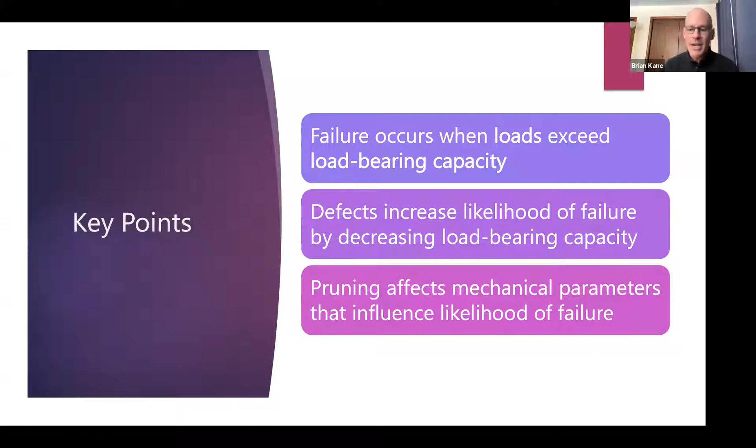One last introductory slide, which we call the fine print, and I don't want to shirk my responsibility for providing some hopefully helpful information, but there's a lot more than we can cover in an hour. In reality, this presentation includes 2 or 3 semesters of engineering and several research projects, a lot of background experience in pruning. We only have time to kind of scratch the surface of this. So it's important to just keep that in mind that there's a lot more to understand about this.

The other thing that's important to remember, certainly in terms of your personal experience as an arborist, is that for most of the topics that we cover in this presentation, there's not a huge amount of research. So it's not like we have thousands and thousands of trees that have been tested for many, many years that provide us a kind of academic or scientific consensus on what happens.

It's actually more important for you in terms of your personal practice to understand some of these basic physics concepts that we're going to cover, because that actually is going to help you apply your experience and this knowledge of some simple physics to all the possible situations that you're going to run into as a professional. So this is actually another really important thing to remember. Your experience is going to be very valuable because we don't have a huge amount of research on many of these topics.

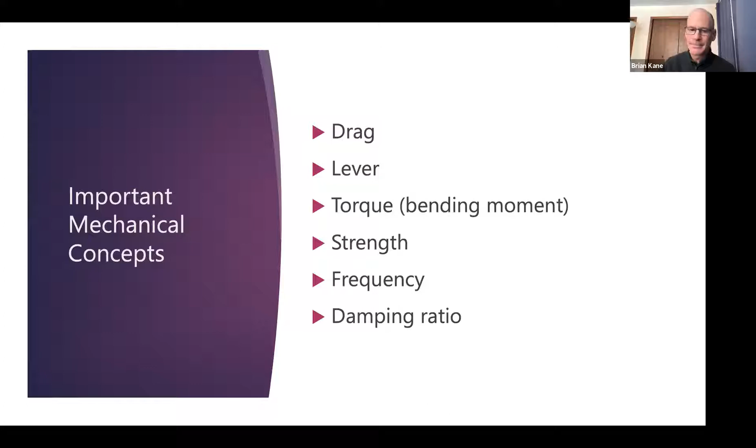So here's just a quick reiteration of this key concept. Failure occurs when the applied load exceeds load-bearing capacity. And so some of the research we've done actually looks at exactly this sort of thing. How much force, how much load can a tree bear when you apply it? So here's just a quick video to illustrate this.

You can see there's a cable up in the top of this tree over here. We're just pulling on this nice large red maple with a winch, with a forestry skidder. We measure the amount of force it takes to break it apart. And then we do tests on trees that don't have decay. We do tests on trees that have weak unions. We also do tests on trees that have decay.

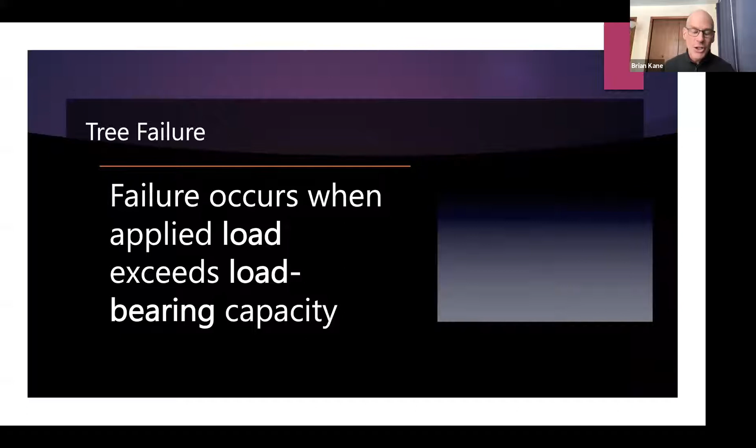Here's a classic example of failure. You can actually see some callus wood right down at the base of this tree. This tree is almost completely hollow, and you see the way it fails. So you actually get a lot of insights into how trees behave as structures when you tear them apart like that.

The load that we are going to focus on today: trees experience lots of different loads. So there are the loads of gravity, the tree's own weight, the loads of gravity affecting snow or ice on a tree; climbing into a tree imparts a load, rigging trees, all of those are loads that trees have to bear. The one that's most relevant for today's topic, in terms of pruning, is the load that is caused by the wind.

And so the wind load, or the force of the wind, has a specific name, and it's called drag. And the equation you see on the screen here is drag is equal to 1/2 times this little P-like letter, and then A, C_D, and V squared. This is a list below of the different variables that are in that equation. So that little P-looking thing is actually the Greek letter rho, and it just signifies air density. A is for frontal area. Imagine taking a picture of a tree and then measuring how much leaf area was presenting itself from the front.

C_D is something called drag coefficient, and I have a slide next to illustrate this and distinguish it from the frontal area. But basically, drag coefficient is a measurement of how streamlined a structure is, so how easy it is for air to pass around a solid object. And the last variable that affects drag is the velocity, symbolized by the letter V.

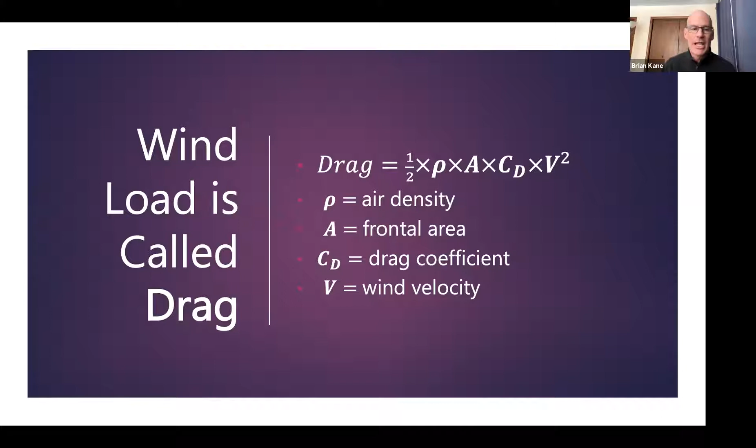So this slide here, I got from the NASA website, the website down at the bottom here. There's actually a lot of really nice illustrations on that NASA website. The drag coefficient is this measurement of how streamlined an object is. And so what you see here is all these black shapes. There's a flat plate, a sphere, a prism, a bullet, and an airfoil. That's just the wing of an airplane.

So all of those objects have the same frontal area. When we're calculating drag, that's what the frontal area is, what you'd measure. And you can put a tree up here and it has a certain frontal area. The drag coefficient, which is typed in red font next to each one of these shapes, is very, very different. Depending on how easy it is for air to pass around that object, that's what the drag coefficient is reflecting. So if you just have a flat plate of steel, the drag coefficient is 1.28.

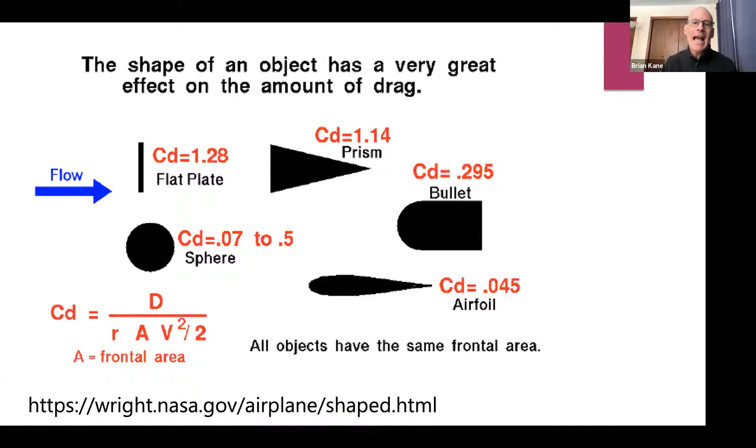Whereas if you have an airplane wing, the drag coefficient is 0.045. So it's much easier for the wind to pass around that airfoil, even though it has the exact same frontal area as this flat plate. So not going to belabor this point, but it is important to recognize that the shape of an object, so the shape of a tree, not just its frontal area, can have an influence on how much drag the tree experiences when the wind is blowing on it.

Okay, so back to this equation for drag. There's all these factors here: air density, frontal area, drag coefficient, and velocity squared. So of these, which is the most important? Hopefully, if you look at the equation, you recognize that velocity is the most important because drag is a function of the velocity squared. So for any of the other factors, like the air density, realistically that's not going to change very much if you're in the same place. It only changes if you go to really high elevation or really low elevation.

So the air density, if you double it, then you'll double the drag. If you double the area, you'll double the drag. If you double the drag coefficient, you'll double the drag. All of those factors have a one-to-one relationship. If you increase them or decrease them, the drag will increase or decrease as a factor of 1.

With velocity, the fact that it is squared means that any multiplier, so if we double the velocity, multiply it by 2, you have to square that, which means the drag is going to be 4 times greater if you double the velocity. And if you triple the velocity, the drag is going to be 3 times 3, 9 times greater. And if you multiply the velocity by a factor of 4, 10 miles an hour to 40 miles per hour, the drag is going to be 16 times greater. 4 squared is 16.

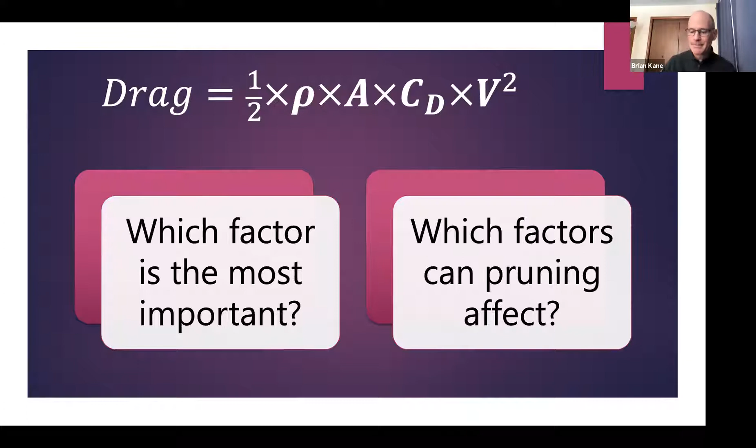When the wind is blowing on a tree, there's a lever that's involved. And I'll show you a diagram of that in the next slide. The lever is basically a distance between where the wind is pushing on the tree, so up in the crown of the tree, and where the tree is being held in the ground. So that distance, we call that a lever. And whenever you have a force that acts over a lever, it's going to create something called a torque.

So anyone who's used a wrench before, the probably common scenario is if you get a flat tire and you've got to loosen the lug nuts on your car tire. You have a wrench, you exert a certain amount of force on that wrench. The torque that you generate is the amount of force times the length of the wrench. That's the lever that you're applying that force over.

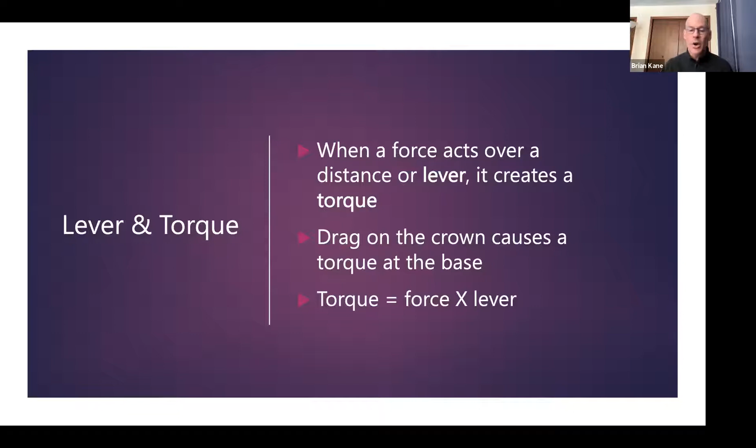So wind does the exact same thing, either to an individual branch, because the branch is basically held at the base where the attachment is, or to the whole tree, because the ground is holding the whole tree in place. So when you have forces acting over a lever or a distance, you get this torque. And the torque is force multiplied by the lever.

Lever is another one of these really important physical concepts because when forces act over levers or over a distance, they get multiplied by that lever and it causes this torque. If you try to loosen the lug nuts on a tire just by holding the lug nut with your hand, good luck. Even if you had a socket wrench and you just tried to hold the socket in your hand and turn it, good luck. You absolutely need a lever. You need to generate a torque to loosen up that nut. The same magnification effect happens when drag is acting on the crown of the tree.

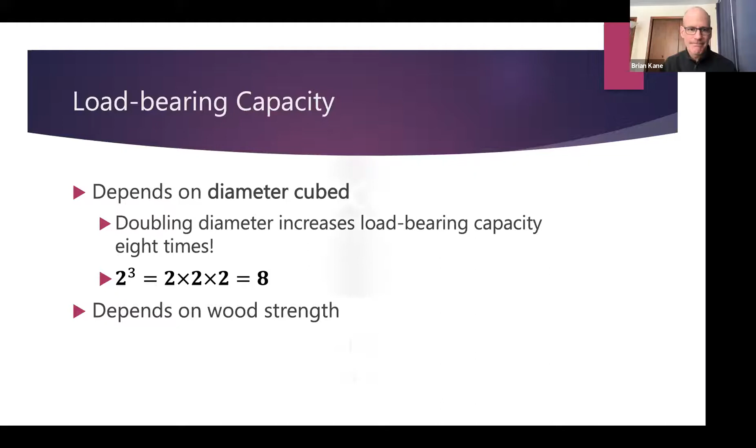Decay is the best example of a defect to illustrate how structural defects like decay or weak branches or cracks and those sorts of things increase the likelihood of failure, because it reduces the load-bearing capacity.

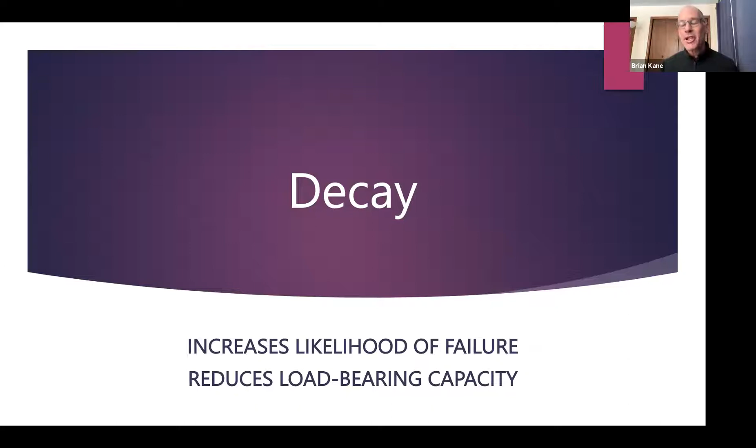Even if this cross section were solid, decayed wood has much lower strength in it. And so even though it's a 20-inch diameter tree, if it were mostly decayed wood, that is not going to provide nearly the same amount of load-bearing capacity. So this becomes important, and I use decay as an example of defects because it's easy to see how it reduces the load-bearing capacity.

But decay is also something that can happen in the long term when we prune trees. So there is a potential impact of pruning, not just in how it changes the drag or the torque on a tree, but also how it potentially decreases the load-bearing capacity because of decay associated with pruning wounds. And so we'll talk about that once again at the end very quickly when we look at pruning.

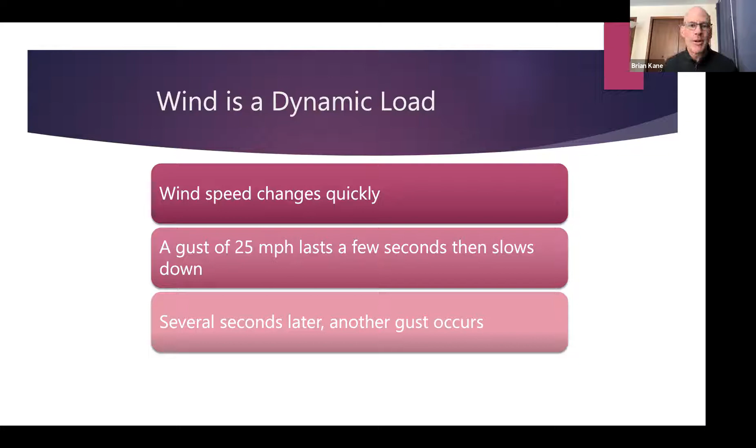Because wind is a dynamic load, we have to understand not just its speed, not just the velocity of the wind, but we also have to know about how the gusts occur with respect to time. And this is called the gust frequency. So it's basically how many seconds elapse between each gust of wind. And it usually is going to be relatively low. So that means it's usually going to be several seconds, 10, 15, 20 seconds between gusts of wind.

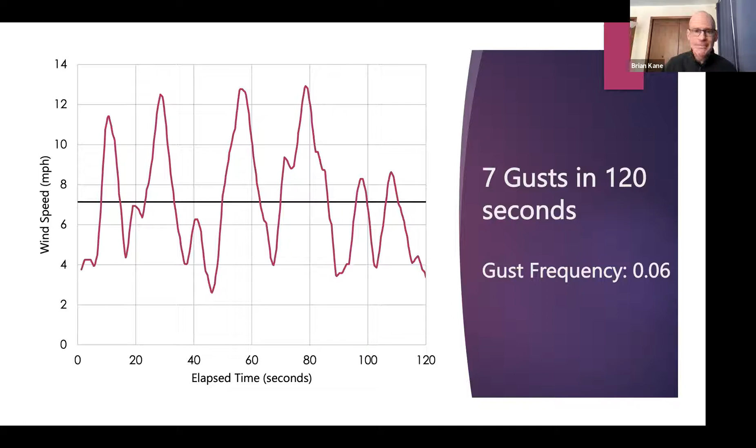The reason this is so important to understand the gust frequencies is because, again, anybody who's watched trees moving around on a windy day knows that the tree responds by swaying. So when the tree is exposed to that force of the wind, when the drag is pushing on that tree, it responds by swaying back and forth. That could be individual branches swaying, or if the wind is strong enough, it could be the whole trunk swaying back and forth.

When we think about the tree responding to these wind gusts by swaying back and forth, we need to understand two important factors that are directly related to the tree itself. And so the first one is called the sway frequency. Just like the gust frequency is how many gusts of wind in a certain amount of time, the sway frequency is just how many tree sways there are in a certain amount of time.

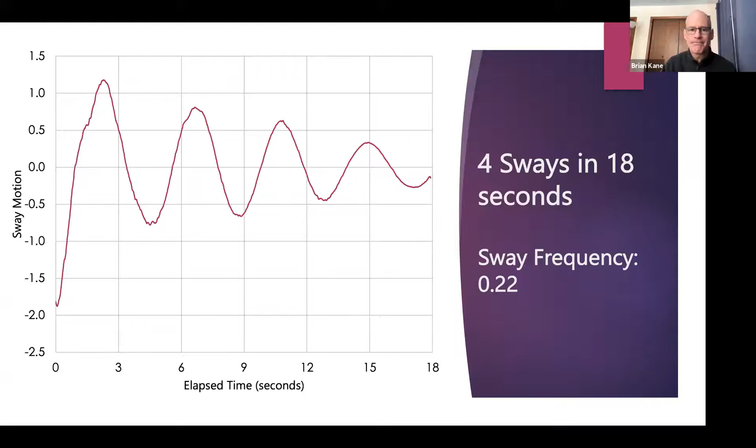0.22 sways every second. And remember, the gust frequency was 0.06, so they're not really close, and that also has implications for tree failure. When the gust frequency is similar to the sway frequency, you have a much greater likelihood of failure. Most wind gusts, again, occur at a lower frequency. So 0.06 is a pretty low frequency.

If the tree sway were closer to that value of 0.06, even if the velocity never changed, even if the wind didn't speed up, you would increase the likelihood of failure because the sway frequency and the gust frequency are similar. So I don't have time to go into the physics that's behind this, but imagine pushing somebody in a swing. When do you push that person to get them to swing more? You push them when they have reached their maximum backwards swing.

You don't push them when they're not right there, because you're going to be pushing air. And you certainly don't push them when they are still moving back towards you, because you're going to either push them off the swing or you're going to break your wrists. So you push them when they are at their maximum backward motion, just before they start going forward again. You can get them to swing higher and higher, more and more, even if you don't exert any more force.

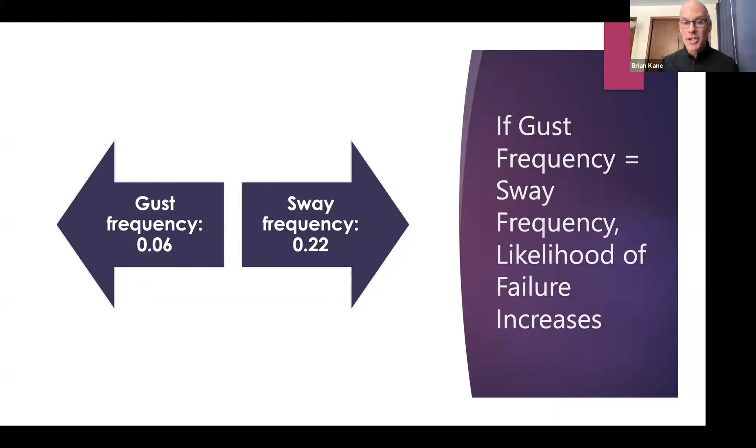So even if the velocity of the wind never increases, if the sway frequency is close to the gust frequency, likelihood of failure increases. So if pruning can change anything, we want sway frequency to be different than the gust frequency.

So one last concept here on this idea of dynamic loads and the dynamic response of the tree, and that's this idea of damping ratio. So you could see wind pushes on the tree, drag pushes on the tree, and if nothing else acts on that tree, no other gust of wind comes by, the tree's going to sway back and forth. Eventually, it's going to stop swaying. That's what damping is. It's basically the dissipation of energy by the tree moving back and forth.

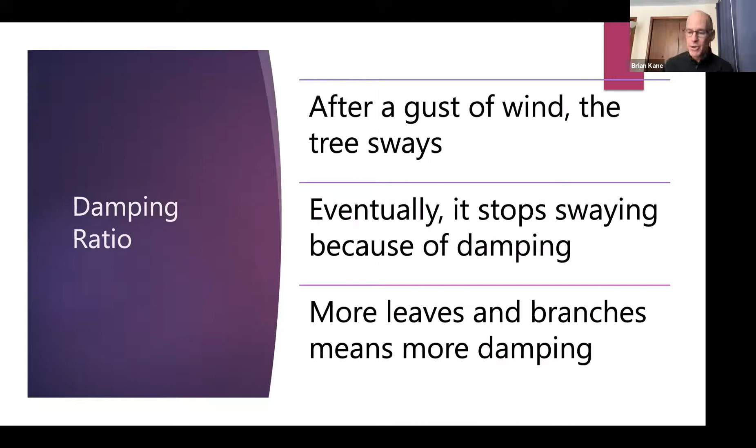And so when you have, for example, lots of leaves on the tree, when you have lots of branches on the tree, all of those factors increase the damping ratio, which means the tree is not going to sway very much after a gust of wind pushes on it. And more damping means lower likelihood of failure. And this video will illustrate that.

If you look closely at the video, you'll watch the trunk only moves a very little bit as we winch it and then let it go. The branches continue to sway for quite some time, but the trunk really only sways back and forth a handful of times. And the reason for that is because those branches are doing a really good job of dissipating the energy. They're moving so that the trunk doesn't move.

You also notice that the branches aren't moving exactly the same. Some of them are going forward and back. Some of them are going backward and forward. Some of them are going up and down. Some of them are going down and up. So when branches move differently like that, that also increases the amount of damping on the tree. And more damping is good. More damping means lower likelihood of failure.

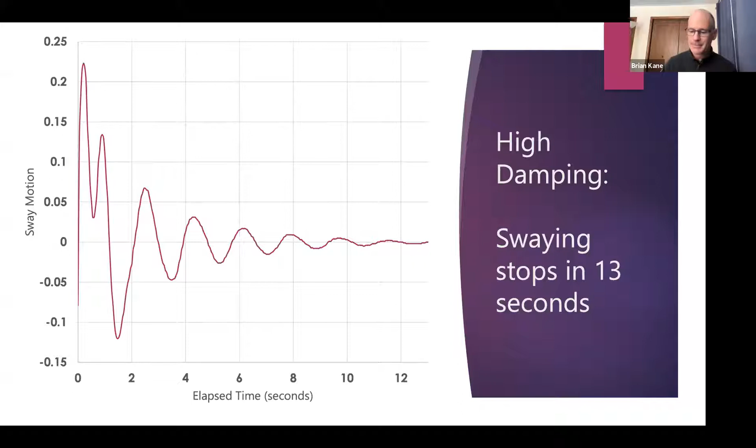So now, again, I apologize for going rather quickly, but that's basically several semesters of engineering pushed into a really short time frame. If you understand those physics concepts, that will give you a really good handle on how pruning can potentially affect likelihood of failure, because pruning potentially can affect the drag, the torque, the lever, the frequency, and the damping ratio. We've done a fair amount of work on this to give us some idea of what's going to happen when you prune a tree in a certain way and if you prune a certain amount.

What hasn't really been done, and I'll reiterate this again at the end, is looking at both short-term and long-term consequences of pruning. Most of the research that has been done by me and by lots of other people has only been short-term consequences of pruning, like driving that tree in the pickup truck, prune it, drive it again, and like 5 minutes later, you're measuring the force on it again. Longer-term consequences are potentially just as important in terms of likelihood of failure, but there haven't been nearly enough long-term studies of how trees respond to pruning.

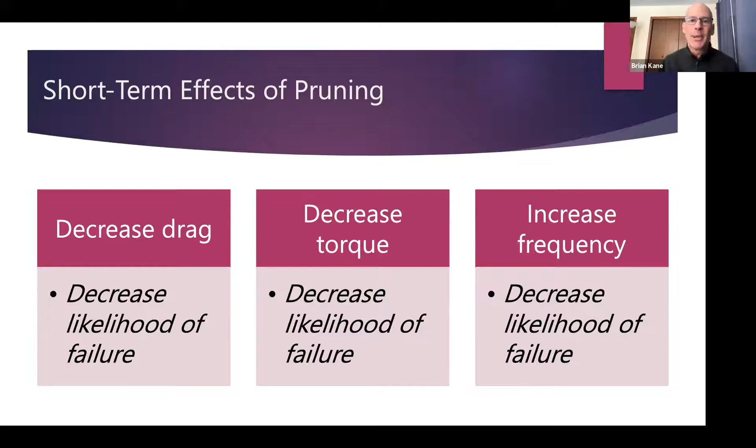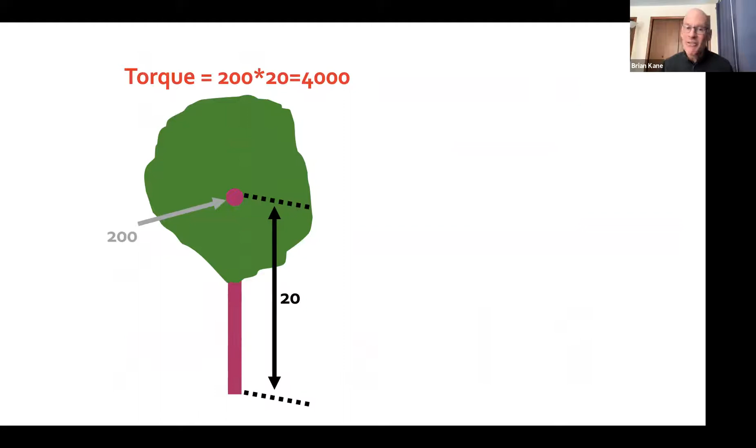So just to put some numbers, here's a tree that experiences 200 pounds of drag. That's the grayish arrow on the left-hand side. And let's just pretend it's got 20 feet of lever. So the torque on this tree is 200 pounds times 20 feet, 4,000 foot-pounds of torque. So we're going to prune this tree.

The first type of pruning is to reduce it. When we reduce it, we're pruning foliage out, so we're reducing the crown area. That means, again, making up these numbers, now there's only 100 pounds of drag. So we've cut the amount of drag in half. Because we shortened the branches by reduction pruning, we also lowered that lever. We brought the crown center down a little bit lower. So now the leverage is only 15 feet.

And of course, now you multiply 100 times 15, and we've got 1,500 foot-pounds of torque. So we reduced both the drag, 200 pounds to 100 pounds, and we reduced the lever, 20 feet to 15 feet. Let's look at a different type of pruning.

If we raise the crown of the tree, we can still reduce the drag. So we still changed the drag from 200 pounds down to 100 pounds of drag. We still cut the drag in half. But because of removal of the lower branches in the crown of the tree, the center of that crown actually got raised up. So it's now 25 feet from the ground.

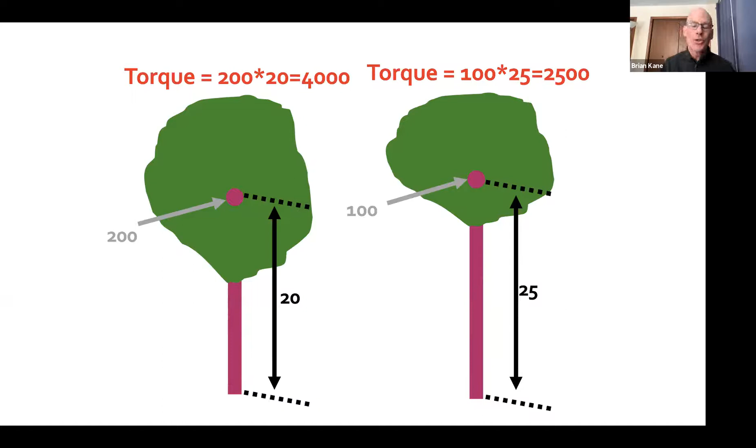So the shorter the branches, the higher the sway frequency. The longer the lever, the lower the sway frequency. Lower frequency is not good. It brings the tree closer to the gust frequency, which is usually going to be low. Faster sway frequency, lower likelihood of failure, because the wind gusts are usually going to be low frequency. So you want a tree that's going to sway back and forth faster, and it's not going to be affected by that swinging effect that we described.

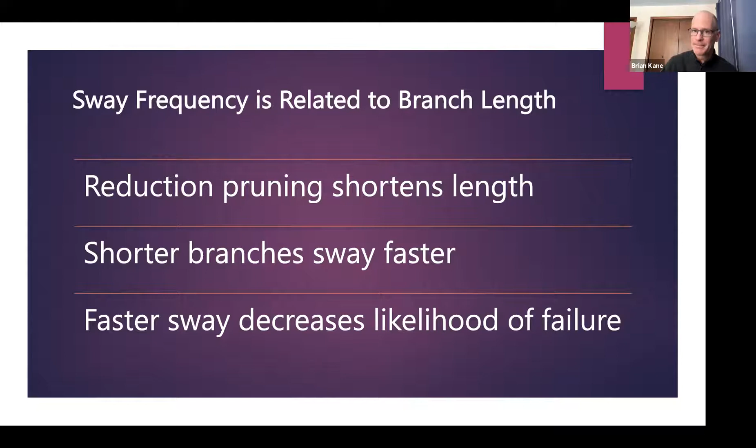All of those effects on drag, on torque, and on sway frequency, all of those have been studied, and we've done some of that work. Others, you listened to Dr. Gilman this morning. He's done some of this work. All of those studies are short-term studies. They basically look at the tree before it's pruned, then prune it, and then test it again, usually within probably an hour or so, maybe even less than that. The long-term effects haven't really been studied nearly as carefully, and as a result, it's hard to know exactly how pruning is going to affect the tree in the long term.

So, for example, depending on the species, depending on the growing conditions, depending on the type of pruning and how severely you prune a tree, the tree is going to regrow some amount. If you prune too much, obviously you're going to kill it. But if you prune within a reasonable amount, and the tree happens to be growing in really good conditions, and it's a species that grows vigorously, maybe within 2 or 3 or 5 years, that tree could have regrown back to a much denser or much taller tree if you don't continue to prune it at some interval. And if you don't go back and prune it again, now the likelihood of failure has gone back to what it was before you pruned it. It might even be a greater likelihood of failure because the tree could be that much bigger.